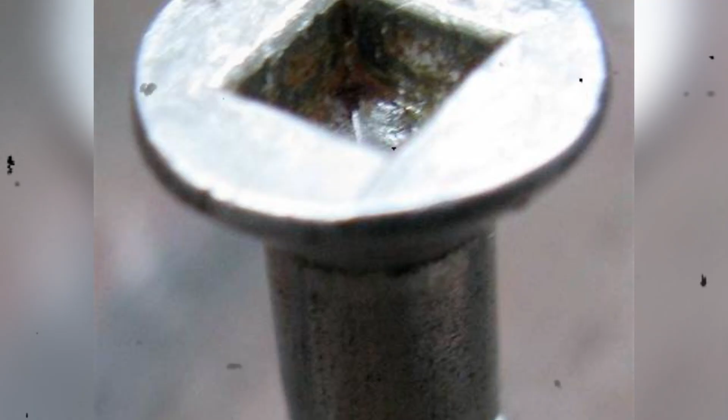In 1914, inside the sprawling automotive assembly plants of the Ford Motor Company, a small piece of Canadian hardware was quietly altering the speed of industrial production. It was a cold-formed screw with a recessed square drive, manufactured in a red brick factory in Milton, Ontario. It did not slip, it did not strip, it did not cam out under the pressure of power drivers.

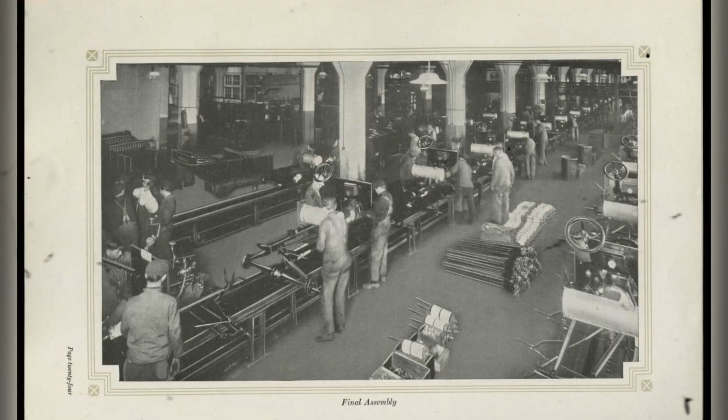Records suggest this single Milton export saved Henry Ford approximately 2 hours of assembly time per vehicle. It reduced wood damage. It prevented assembly line injuries. It was, by every mechanical measure, a flawless industrial fastener.

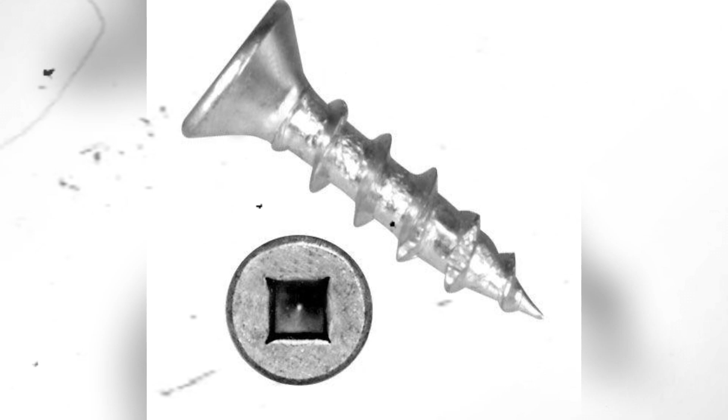Ford wanted it for every factory. He demanded the exclusive rights to manufacture the square drive screw in the United States. But the inventor sitting in Milton refused to surrender control of his patent. He would not license the manufacturing rights. He demanded that every screw be purchased directly from his Canadian plant. That single negotiation sealed the fate of the Robertson screwdriver.

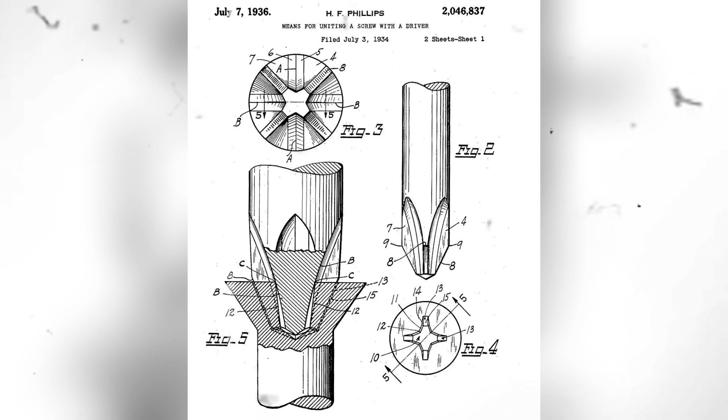It created a profound industrial paradox. Inside Canada, the Robertson drive became the undisputed standard of the trades. Its color-coded handles, green, red, and black, would eventually populate every carpenter's belt, every logging camp workshop, and every hardware store aisle from Nova Scotia to British Columbia. It completely locked the American Phillips drive out of the domestic Canadian construction industry. But outside the Canadian border, the square drive was practically exiled. The Milton Empire secured its domestic dominance at the cost of global expansion.

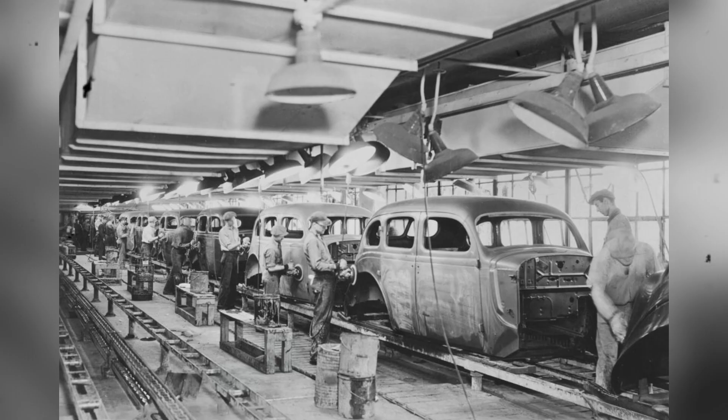Decades later, the original Ontario production lines would halt, the foundational company would be absorbed by American corporate conglomerates, and the ultimate Canadian hand tool would be stripped of its independence. The perfect screw survived, but the Canadian tool-making empire behind it was slowly dismantled.

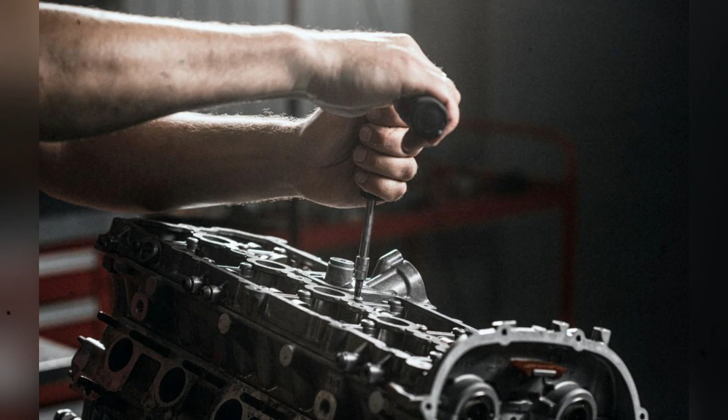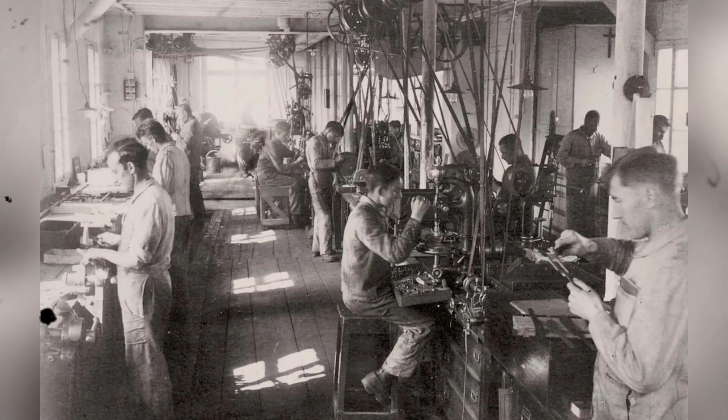For decades, cabinet makers in Ontario, boat builders in Nova Scotia, and mechanics in early Montreal automotive shops accepted cam out as an inevitable cost of doing business. They accepted the stripped screw heads. They accepted the gouged wood. They accepted the bloody knuckles.

The Canadian manufacturing sector was rapidly accelerating toward mass production. The era of pure craftsmanship was giving way to the era of assembly lines. Yet this entire industrial system was held back by a fastener that could not be reliably driven at high speed. The slotted screw was a bottleneck on the factory floor.

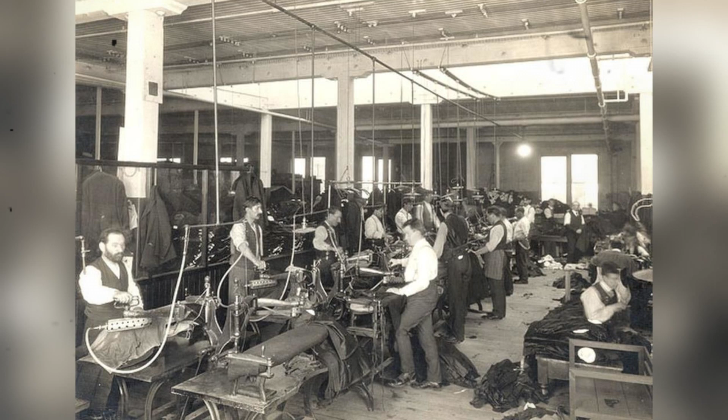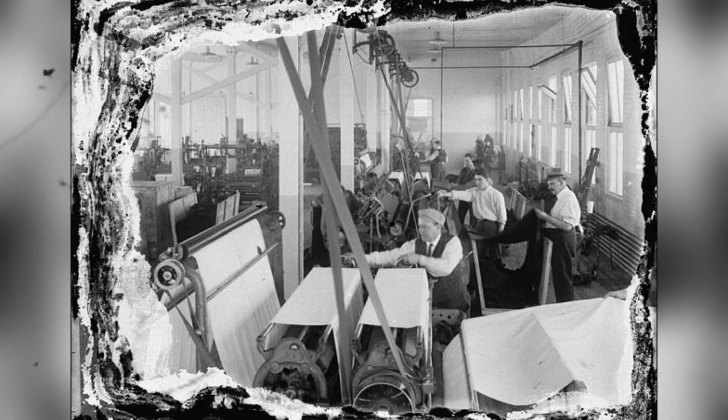It required two hands to operate, one to hold the screw and one to turn the driver. If an early electric or pneumatic driver was applied to a slotted screw, the tool would violently jump from the slot, destroying the workpiece and stalling production. The Canadian industrial economy desperately needed a fastener that could handle immense rotational force without failing.

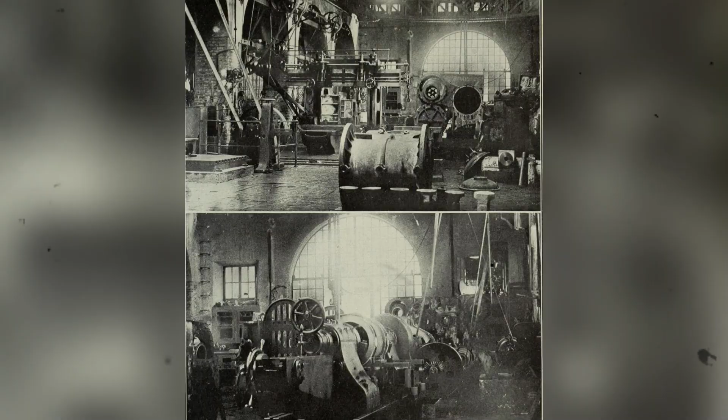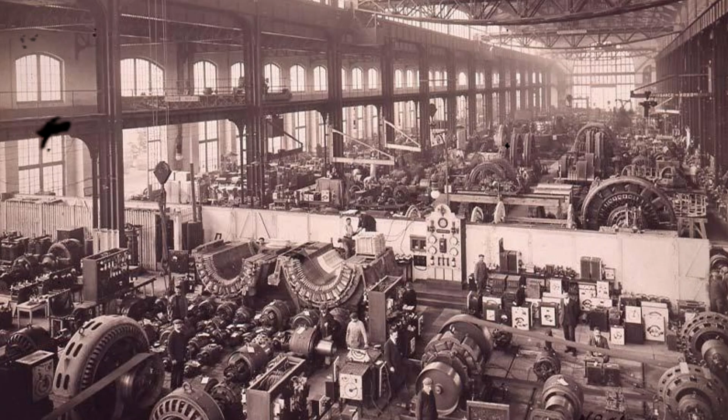The solution was born from physical injury. Peter Lymburner Robertson was a traveling salesman from Seneca Township, Ontario. By one account, he was demonstrating a spring-loaded screwdriver to a group of potential clients on the streets of Montreal. As he applied pressure, the flat blade violently slipped from the slotted screw. The steel drove deep into his hand.

It was a severe cut, but it crystallized a mechanical truth. The straight slot was fundamentally obsolete. A recessed drive, a socket that could physically capture the tip of the screwdriver and lock it in place, was the only logical path forward for modern manufacturing.

The concept of a square drive screw was not entirely new. European and American inventors had theorized it for years, but previous attempts had universally failed at the manufacturing stage. If a factory tried to cut, mill, or punch a square hole into a heated screw head, the surrounding metal would weaken. The corners of the square would easily strip out under the pressure of a screwdriver. The fastener would fail before the wood was clamped tight.

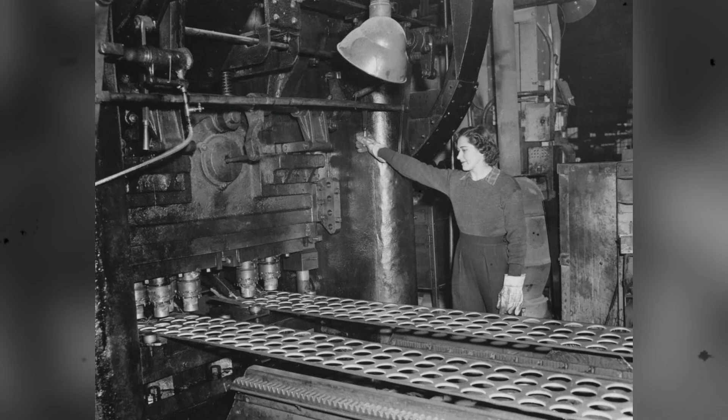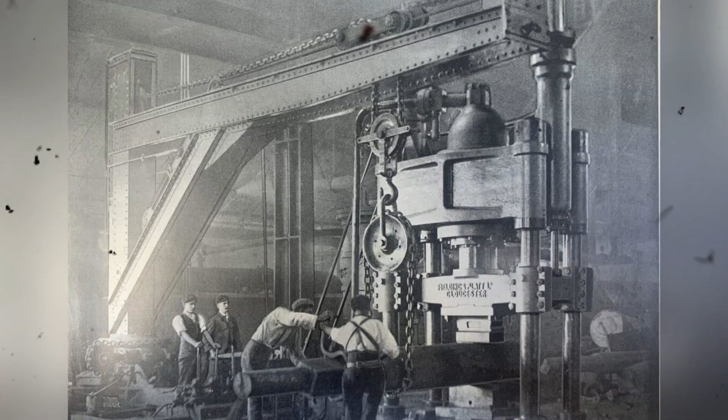Robertson's genius was not just the shape of the recess, but the precise method of forging it. He developed a proprietary cold-forming process. A hardened steel punch would strike the cold steel wire with immense force, simultaneously shaping the dome of the screw head and pressing the tapered square recess deep into the metal. Because the steel was not heated or cut, the cold-forming process heavily compressed the metal grain around the socket. It made the walls of the square recess drastically stronger than the surrounding metal.

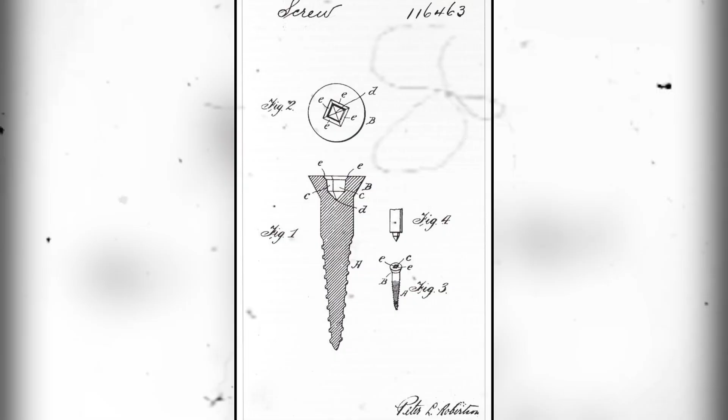It was a flawless manufacturing method. It produced a screw that was virtually indestructible under normal torque. In 1909, Robertson patented his cold-formed square drive screw.

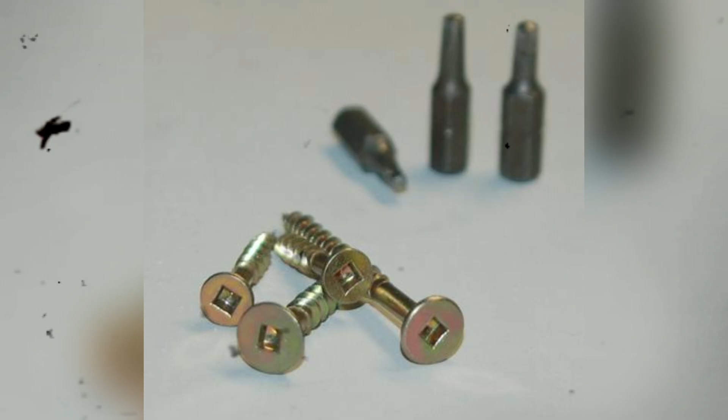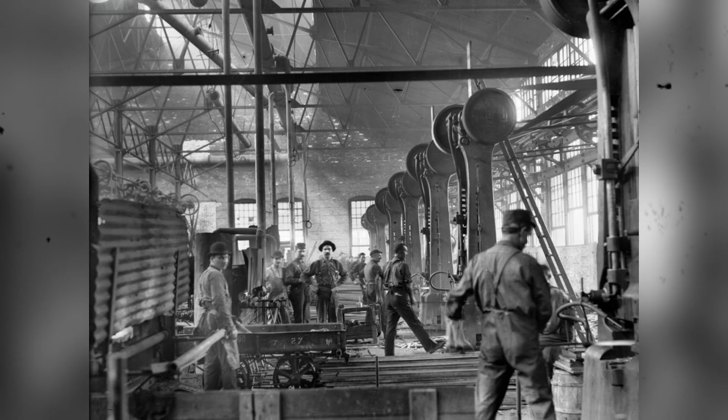He now needed a manufacturing base to scale his invention. He found it in Milton, Ontario, a growing industrial town west of Toronto. The town recognized the potential of his patent and offered a municipal loan, a tax exemption, and the necessary infrastructure to build a serious tool-making operation. The P.L. Robertson Manufacturing Company was officially established in a modest brick facility on Bronte Street.

Getting the square drive screw into the Canadian market required overcoming massive industrial inertia. Factories across the country already possessed millions of slotted screws and thousands of flathead screwdrivers. Transitioning to a proprietary fastener meant changing entire workshop supply chains.

Robertson aggressively marketed his invention directly to local tradesmen. The initial Canadian entry occurred through persistent demonstrations to local woodworkers and small-scale manufacturers in southern Ontario.

When a Canadian carpenter tried the Robertson screw for the first time, they discovered a radical new capability. The slight taper of the square recess allowed the screw to physically cling onto the matching tip of the screwdriver. This friction fit, known as cling, meant a worker could place the screw on the driver, extend their arm, and drive the fastener into the wood using only one hand.

They did not need to hold the screw. They could drive it upside down. They could drive it at awkward angles.

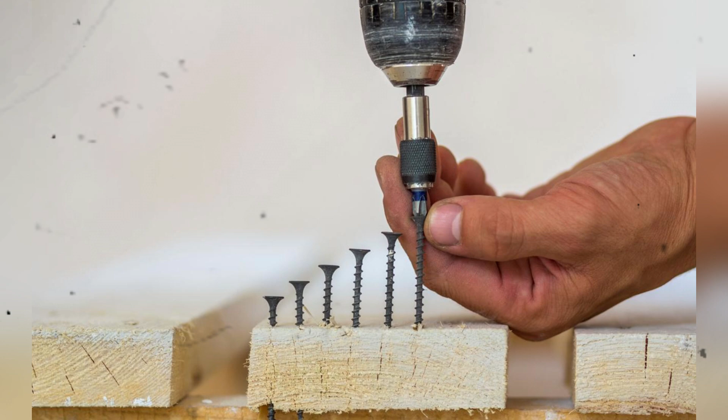The early reception in Canadian industrial circles was an absolute revelation. The T. Eaton Company, a titan of early Canadian retail and manufacturing, began using Robertson screws in their massive Toronto furniture factories to drastically speed up cabinet assembly. Early automotive bodybuilders, such as the Ford Motor Company in Walkerville, Ontario, recognized that the square drive entirely eliminated the devastating paint scratches caused by slipping screwdrivers on assembly lines.

Local hardware stores across Halton County began stocking the new fastener, and tradesmen quickly realized its superiority over anything imported from the United States or Great Britain. The Milton factory began running at capacity. Local hardware catalogs started dedicating space to the unusual square hole. The local trades had spoken.

The Canadian workshop needed a fastener that would not slip, strip, or fail under pressure. P.L. Robertson had delivered it, and the stage was set for an unprecedented expansion into the very heart of North American heavy industry. The shift from a small Milton operation to a national industrial titan required more than just local word of mouth. It required a fundamental mechanical superiority that could be mathematically proven on a balance sheet.

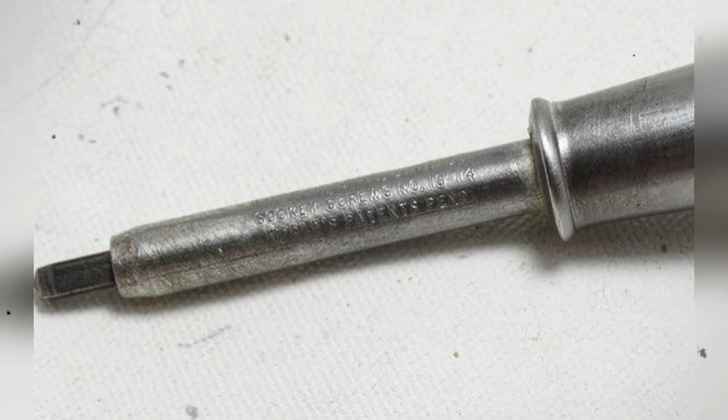The physical architecture of the Robertson fastening system was deceptively simple, yet perfectly engineered for the realities of early 20th century mass production. The recess in the screw head was not a simple punch box. It was a carefully designed, slightly tapered square socket. The matching screwdriver tip featured the exact same precise taper.

This specific geometry achieved two critical mechanical functions that the straight slotted screw could never replicate. First, the square drive distributed the rotational force evenly across the four interior walls of the screw head, rather than concentrating it entirely on a single thin, fragile slot. This massive increase in surface contact allowed workers to apply extreme torque without breaking the screw.

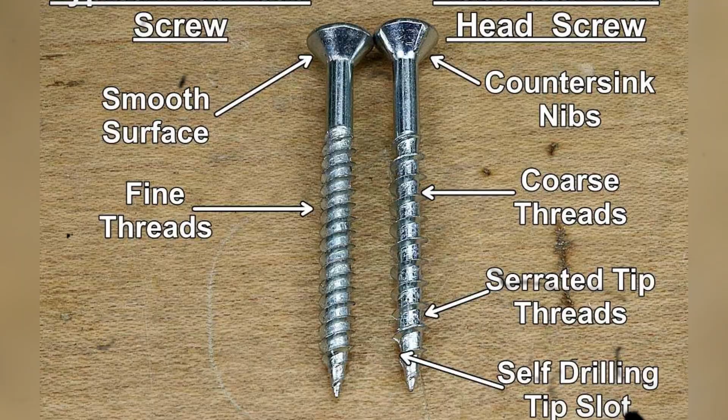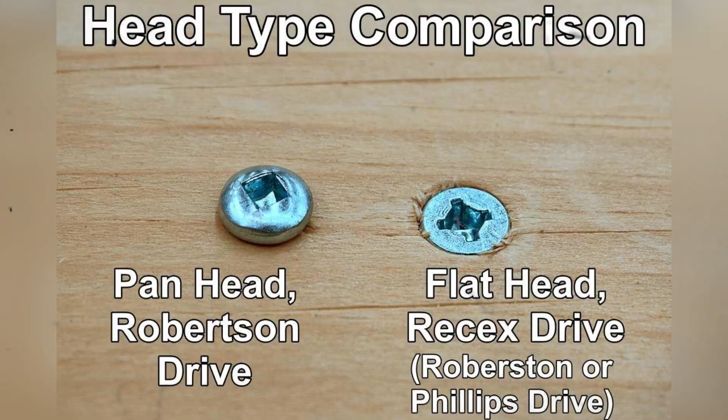Second, the slight taper created an interference fit. When the steel driver was pushed into the steel screw, the two pieces of metal physically wedged together. This mechanical wedge created cling. A mechanic or carpenter could load a fastener onto the driver tip, extend their arm, and swing the tool like a hammer without losing the screw.

In the chaotic, cramped, and rapid environment of an assembly line, the ability to drive a fastener entirely with one hand was an industrial revelation. It freed the worker's second hand to hold the workpiece, position the material, or stabilize their own body.

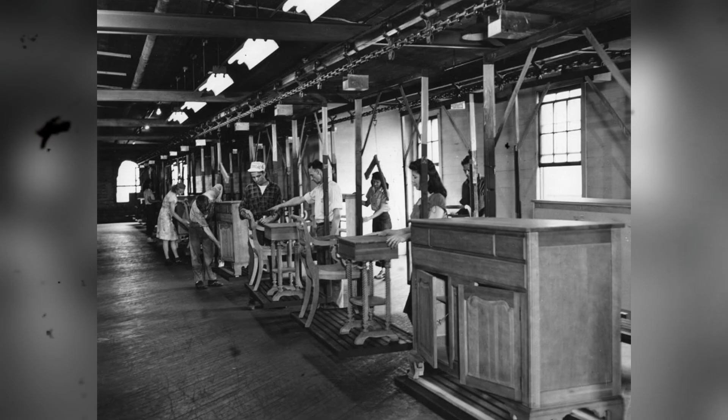But a brilliant design is useless if it cannot be manufactured at scale. P.L. Robertson's ultimate Canadian moat was his proprietary cold-forming process. To create the perfect square recess,

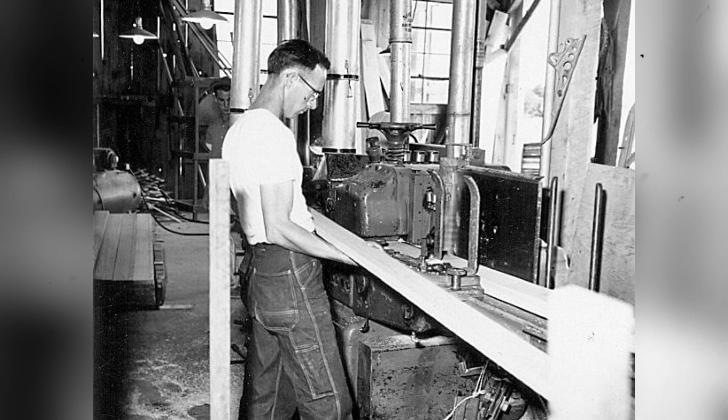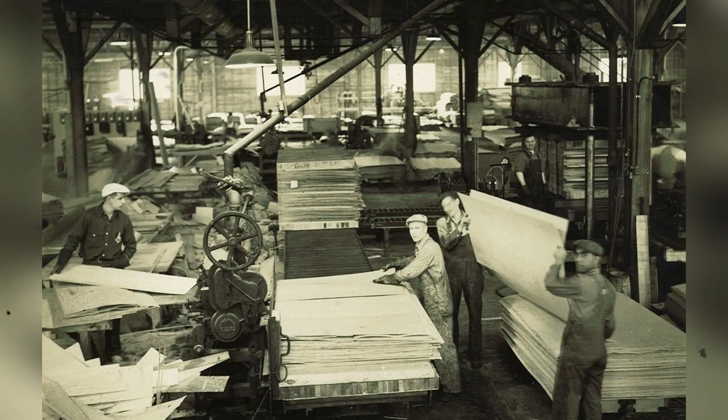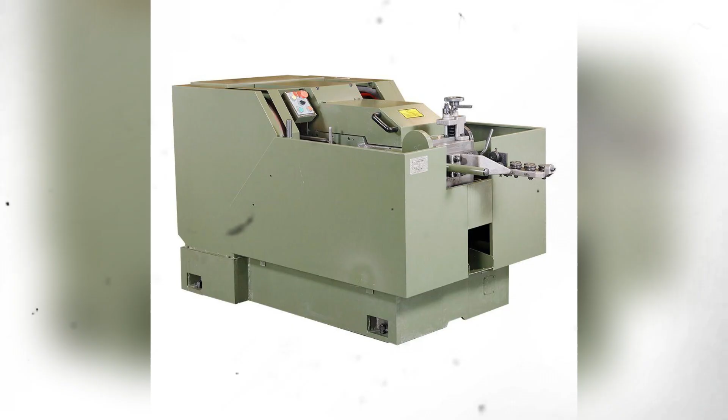Raw, unheated steel wire was fed into massive, violently loud heading machines in the Milton factory. A hardened steel punch struck the wire with thousands of pounds of pressure, instantly forging the dome of the screw and driving the square hole deep into the center. Because the metal was not heated or cut, the cold-forming process heavily compressed the microscopic grain structure of the steel around the socket. It hardened the walls of the drive. It created a fastener that was virtually indestructible under the intense torque of industrial machinery.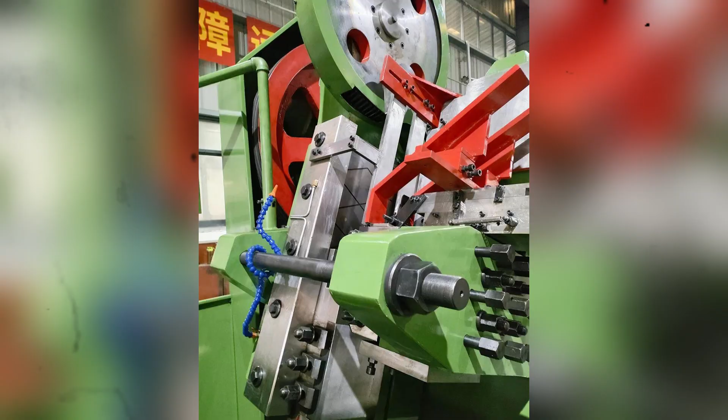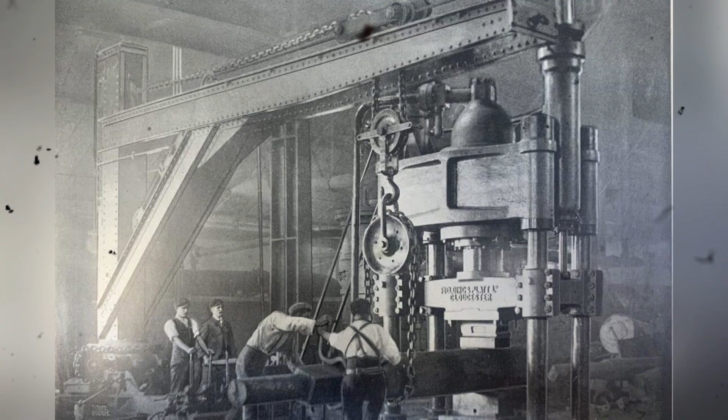The Canadian price context was initially challenging. Robertson screws were slightly more expensive to manufacture per unit than traditional slotted screws. But for large-scale manufacturers, the raw cost of the fastener was irrelevant compared to the cost of human labor and damaged materials. The slotted screw was a liability. When a driver slipped from a slotted screw, the inevitable cam-out, it frequently gouged the surrounding wood, ruined finished surfaces, and slashed the hands of the workers.

The Robertson screw eliminated cam-out. It eliminated the ruined dashboards. It eliminated the bloody knuckles. It eliminated the wasted hours spent extracting stripped fasteners.

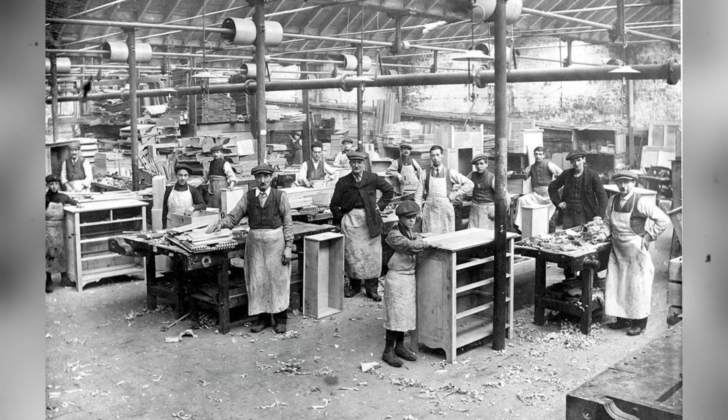The ultimate breakthrough occurred when the Canadian automotive industry recognized this economic math. In Windsor, Ontario, the Ford Motor Company of Canada was rapidly expanding its assembly lines to meet the exploding demand for the Model T. Early automobiles were heavily constructed of wood. Their frames, floorboards, and interior structures required thousands of driven fasteners per vehicle. When Ford of Canada adopted the Milton-made square drive, the acceleration in production was staggering. Available reports indicate that the Robertson screw saved Ford assembly lines roughly 2 hours of labor per vehicle. In the high-volume, hyper-efficient world of automotive manufacturing, 2 hours of saved time was a monumental competitive advantage.

The success in Windsor triggered a massive cascade across Canadian heavy industry. The Fisher Body Company in Walkerville, Ontario, which built the wooden bodies for numerous early automotive brands, placed massive orders with the Milton factory. The square drive allowed their workers to safely use early motorized and pneumatic driving tools, a process that was previously impossible with slotted screws.

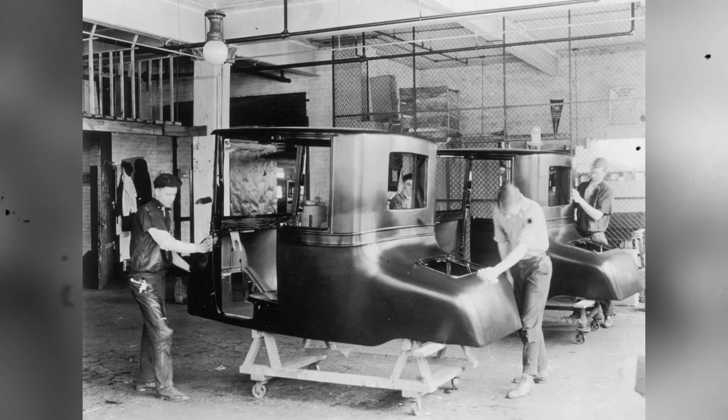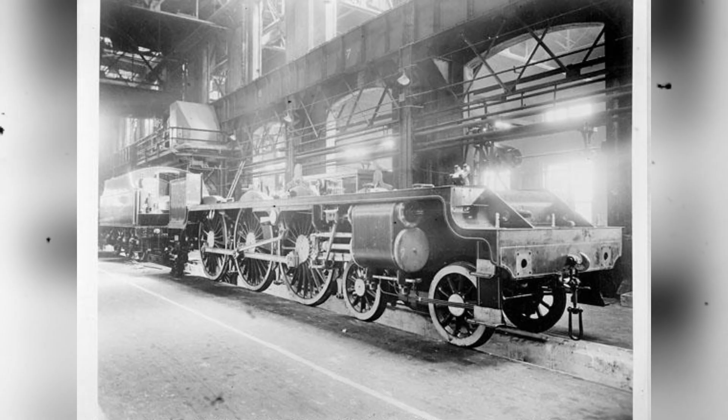This industrial adoption quickly spread beyond the automotive sector. The Canadian Pacific Railway operated the colossal Angus shops in Montreal, Quebec. It was a sprawling industrial complex where thousands of wooden boxcars and passenger carriages were constructed. The Angus shops required a fastener that could withstand the intense, constant vibration of rail travel, yet be driven fast enough to keep up with rolling assembly quotas. They adopted the Robertson drive.

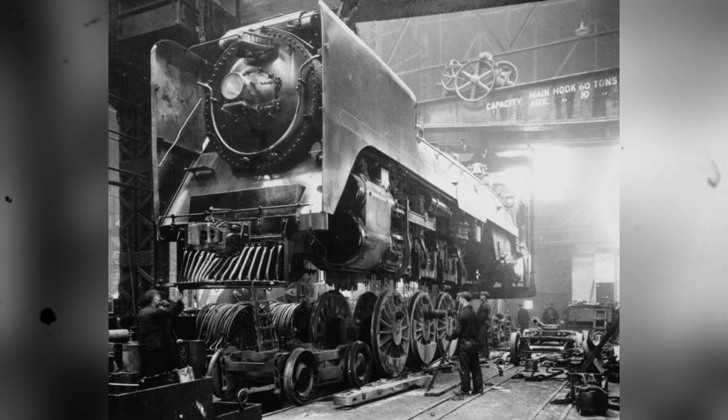The Russell Motor Car Company in Toronto integrated the fasteners into their production. The T. Eaton Company in Toronto, operating massive furniture manufacturing divisions to supply their national catalogs, transitioned their cabinet makers to the square drive. Suddenly, the Robertson screwdriver was no longer just an automotive assembly tool. It was bleeding out into the general Canadian trades.

As thousands of factory workers used the square drive at work, they began demanding it for their own personal toolboxes. Plumbers, electricians, and carpenters across Ontario realized that their traditional slotted screwdrivers were obsolete. The Milton factory aggressively expanded its distribution network to meet this demand. They secured contracts with major Canadian hardware distributors and local mercantile stores. From Halifax to Vancouver, hardware shelves began stocking the distinctive square-tipped drivers alongside massive wooden crates of Robertson fasteners.

P.L. Robertson had built a flawless industrial fortress. He held the patents. He controlled the proprietary cold-forming machinery. He dictated the manufacturing tolerances. He owned the Milton plant. He had successfully embedded his exact specific standard into the assembly lines of the nation's largest manufacturers and the toolboxes of the nation's independent tradesmen. The Canadian workshop was completely transformed, and the Robertson manufacturing empire was poised to enter an era of unprecedented glory.

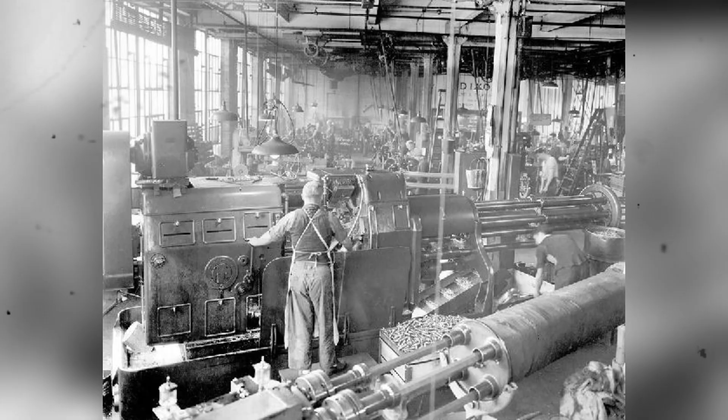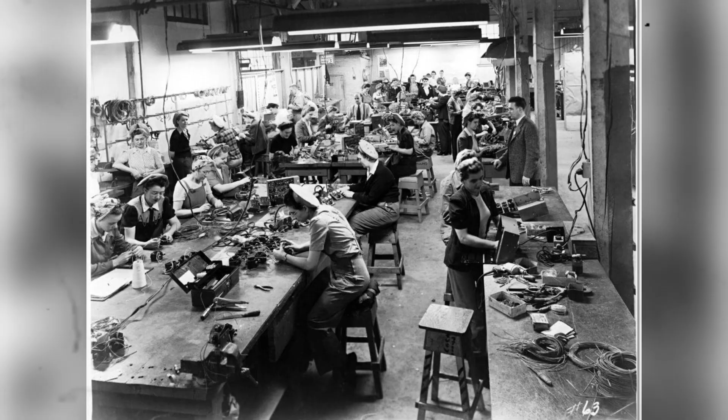By the middle of the 20th century, the P.L. Robertson Manufacturing Company was no longer just a successful local business. It was the gravitational center of the Canadian hardware industry. The original brick building on Bronte Street in Milton had metastasized into a sprawling, multi-acre industrial fortress. It was a self-contained empire of steel, noise, and constant production. The town of Milton essentially synchronized its daily rhythm to the factory whistle. Generations of Halton County families walked through the factory gates, manning the violent, deafening cold-heading machines that continuously punched raw steel wire into perfect square drive fasteners.

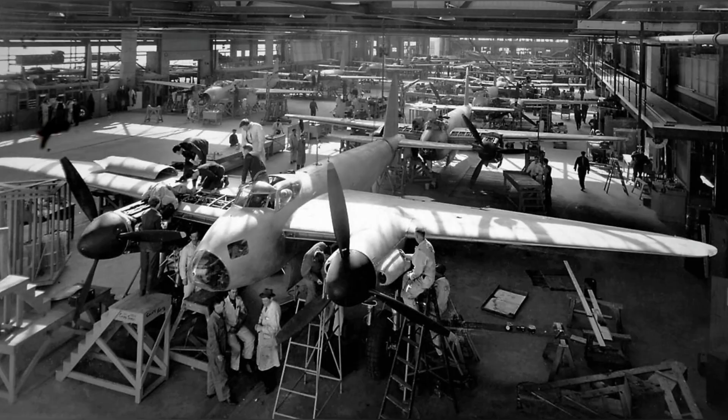The true scale of the Robertson Empire was forged during the Second World War. When the Canadian government mobilized its manufacturing sector for the war effort, the demand for reliable, high-speed fasteners skyrocketed. Slotted screws were a liability in wartime production. There was no time for stripped heads, delayed assembly, or gouged aluminum. The Milton factory became a critical military supplier. When Victory Aircraft in Malton, Ontario, began constructing the legendary de Havilland Mosquito bombers, aircraft famously built almost entirely of wood, they relied heavily on Robertson screws. The precise, slip-free drive was essential for assembling the delicate, high-stress wooden airframes without damaging the surrounding material.

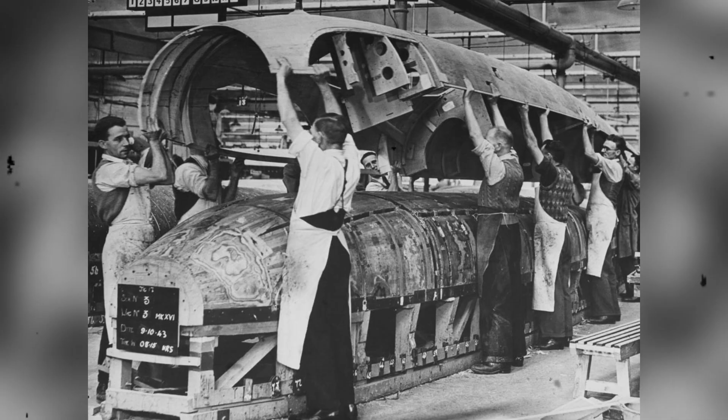On the eastern coast, the sprawling Halifax shipyards in Nova Scotia utilized immense quantities of Milton fasteners to construct the wooden interiors and electrical panels of Royal Canadian Navy corvettes. The war effort required speed, standardization, and absolute reliability. P.L. Robertson delivered all three. The factory operated around the clock, churning out tens of millions of fasteners a month to feed the Canadian war machine. The square drive proved it could withstand the brutal conditions of military assembly lines just as flawlessly as it had conquered the Ford automotive plants decades earlier.

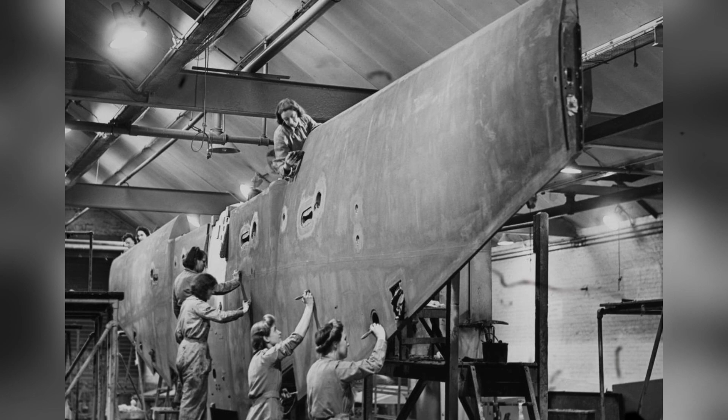When the war ended, the Milton plant did not slow down. It immediately pivoted to supply the greatest construction boom in Canadian history. The creation of the Canada Mortgage and Housing Corporation, or CMHC, triggered an unprecedented explosion of suburban development. Millions of new homes were built across Ontario, Quebec, and the western provinces. Every single one of those homes required hinges, floorboards, electrical boxes, cabinetry, and door frames. The Canadian construction industry universally standardized on the square drive.

It was during this post-war explosion that the Robertson Empire codified its most brilliant and enduring cultural innovation: the color-coded handle system. To help tradesmen instantly identify the correct screwdriver size in a dark toolbox or cluttered workbench, the Milton factory implemented a universal visual language.

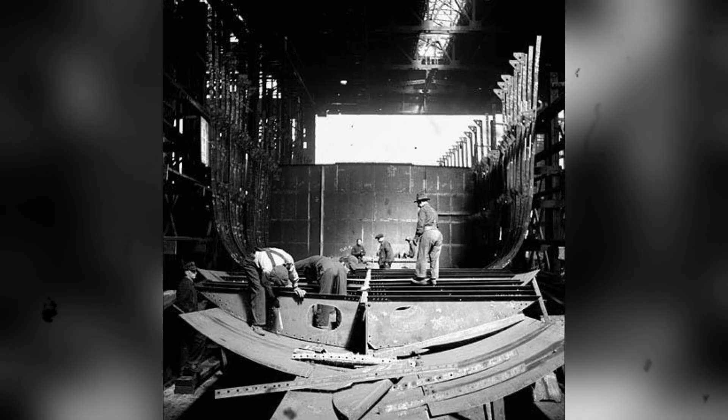The number 0 drive, used for fine cabinet work, was assigned a yellow handle. The number 1 drive, the standard for hinges and smaller hardware, was given a green handle. The number 2 drive, the absolute workhorse of the Canadian construction industry, used for framing and general carpentry, received the iconic red handle. The heavy-duty number 3 drive, reserved for massive structural screws, was marked with a black handle.

This color system bypassed the need to read small stamped numbers on a steel shank. A carpenter on a scaffold in Toronto could look down at his belt, see the red acetate handle, and instantly know he had the correct tool for the number 2 fastener in his hand. It was a triumph of Canadian industrial design.

The yellow, green, red, and black handles became the unofficial flag of the Canadian tradesman. Trade schools across the country, from the vocational programs in Vancouver to the technical institutes in Montreal, exclusively taught their apprentices using Robertson drivers. A generation of Canadian carpenters, electricians, and plumbers learned their trade holding a Milton-made tool.

They learned the feeling of the interference fit. They learned the speed of one-handed fastening. The straight slotted screwdriver was effectively banished from the professional Canadian job site, relegated to the bottom drawer, used only for prying open paint cans or scraping dried glue. The Canadian workshop had completely assimilated the square drive. It was no longer just a tool, it was an expectation.

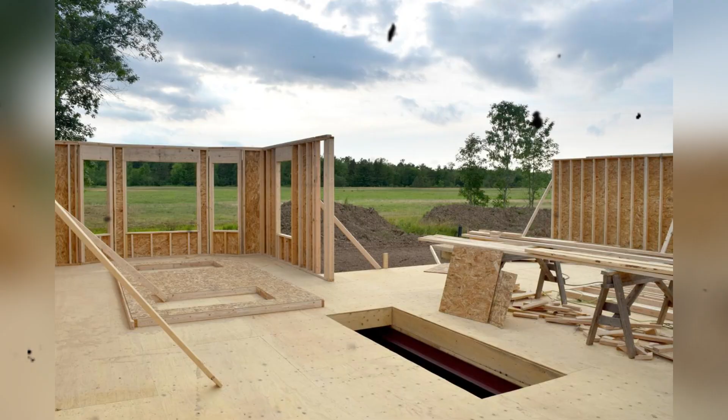The retail conquest of the Canadian market was absolute. When a tradesman walked into a Canadian Tire store in the 1970s, they were not looking for a generic fastener. They were looking for the iconic green cardboard boxes printed with the P.L. Robertson name. Entire aisles were dedicated to the Milton Empire. Massive pegboards displayed rows of acetate-handled screwdrivers, categorized strictly by the yellow, green, red, and black color system.

The distribution network stretched from coast to coast. J.H. Ashdown Hardware in Winnipeg, the massive western mercantile giant, shipped trainloads of Robertson fasteners across the prairies to supply agricultural repair shops and local hardware dealers.

In St. Jacobs, Ontario, the newly formed Home Hardware Cooperative made the square drive a foundational pillar of its national inventory. The Eaton's and Sears Canada catalogs prominently featured Robertson driver sets in their tool sections, ensuring that even the most remote farming communities in Saskatchewan had direct access to the slip-free technology.

The Milton factory had evolved into a massive, highly optimized industrial ecosystem. By the late 20th century, the Bronte Street plant employed hundreds of local workers. The production floor was a deafening expanse of mechanical power.

Massive spools of raw Canadian steel wire were fed into batteries of cold-heading machines. The headers punched the square recess, the thread rollers violently pressed the helical threads into the shanks, and massive heat-treating furnaces hardened the metal to exact specifications.

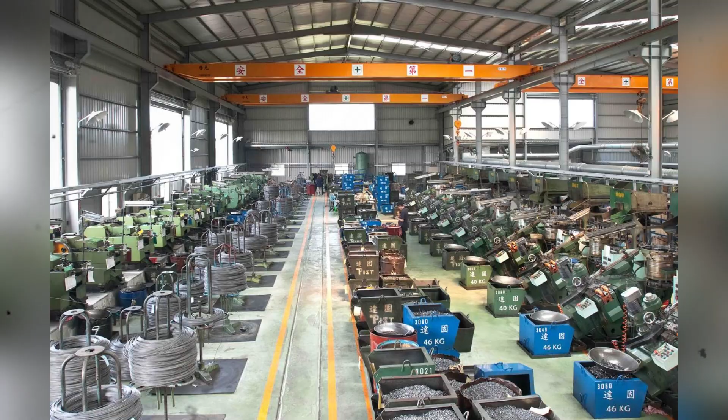Electricians wiring the massive hydroelectric dams in Quebec relied on the long-shank Robertson drivers to securely fasten terminal blocks inside deep electrical panels without dropping the hardware into the machinery.

This was the peak of the Canadian workshop experience. To reach into a leather tool pouch and pull out a red-handled Robertson screwdriver was to hold a flawless piece of domestic engineering. It was a tool that solved a universal industrial problem, manufactured entirely within the borders of Ontario, distributed through national retail networks, and driven into the spruce frames of millions of Canadian homes.

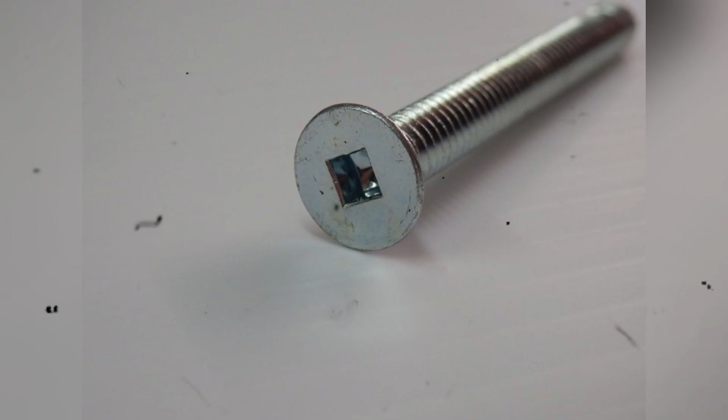P.L. Robertson had built a self-sustaining industrial loop. The Milton factory had achieved total market saturation. Every framing crew in Calgary, every boatyard in Halifax, and every assembly line in Windsor relied on the precise, tapered geometry of the square recess. It was a domestic empire without equal, but this massive scale masked a fatal vulnerability. The entire Robertson operation was perfectly optimized to feed a single, isolated market.

The fortress was impenetrable from the inside, but it was entirely cut off from the global economy. The perfect screw had conquered the nation, but the decisions of the past had guaranteed it would never conquer the world. The collapse of the Milton toolmaking empire was not triggered by a failure of engineering. It was triggered by a fatal miscalculation of industrial leverage.

The systemic fracture of the P.L. Robertson Manufacturing Company did not begin in the late 20th century. The turning point occurred decades earlier, precisely at the moment the square drive was poised to conquer the American automotive industry. By all historical accounts, Henry Ford recognized the absolute mechanical superiority of the cold-form square drive. His early Canadian assembly lines in Windsor had proven that the Milton fastener saved immense amounts of labor, prevented material damage, and vastly improved production speed.

Ford wanted to standardize the entire Ford Motor Company, the largest industrial manufacturing system on the planet, on the Robertson fastener. But Ford demanded supply security. The American industrial machine could not rely on a single independent factory in Ontario to feed its global assembly lines. A border dispute, a railway strike, or a catastrophic fire at the Milton plant could paralyze Ford's entire automotive production.

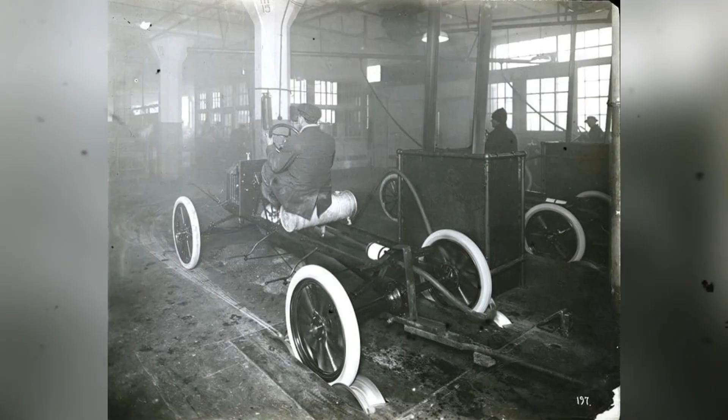Therefore, Ford demanded the rights to license the patent. He wanted to manufacture the square drive screws in his own factories, or license multiple American steel mills to produce them simultaneously. P.L. Robertson refused. He had previously suffered a disastrous licensing agreement in Great Britain, an ordeal where he temporarily lost control of his patents, his capital, and his international manufacturing rights.

That European failure left him fiercely protective of his proprietary cold-forming process. He refused to license the manufacturing rights to anyone. He demanded that Henry Ford purchase the fasteners directly from the Milton plant, or through a wholly owned subsidiary that Robertson completely controlled. Ford withdrew. The Ford Motor Company would not be held hostage by a Canadian supplier. The negotiation collapsed, and with it, the single greatest opportunity for Canadian hand tool dominance in history.

This refusal created a massive vacuum in the American industrial market. The United States manufacturing sector desperately needed a recess-driven screw to replace the obsolete slotted fastener. In the 1930s, an American businessman named Henry F. Phillips provided the solution. He patented the crosshead drive.

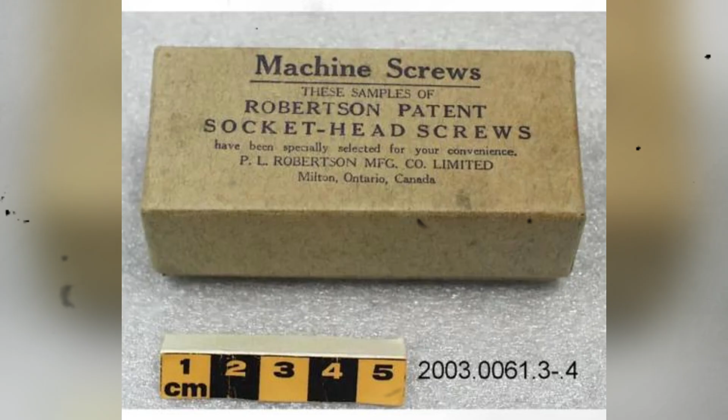Mechanically, the Phillips drive was fundamentally inferior to the Robertson for manual trade work. It possessed sloping internal walls specifically designed to cam out. It was engineered to forcefully eject the screwdriver tip to prevent automated heavy torque assembly machines from over-tightening the fastener. It damaged the screw head by design. It required intense forward pressure to keep the driver engaged. It was everything the Canadian square drive had successfully eliminated.

But Henry F. Phillips understood the systemic power of corporate licensing. Phillips did not want to build a sprawling factory. He did not want to manufacture screws. He simply wanted to license the crosshead design to every massive steel mill and fastener factory in the United States.

General Motors adopted the Phillips drive for the 1936 Cadillac assembly lines. The American military adopted it to standardize wartime production. The United States hardware market completely surrendered to the crosshead design. The Canadian tool-making empire was permanently locked out of the largest consumer and industrial market on Earth. The perfect square drive was effectively quarantined north of the 49th parallel.

For decades, the sheer, overwhelming volume of the domestic Canadian construction boom masked this fatal vulnerability. The Milton factory was running at maximum capacity. The green, red, and black handles were dominating Canadian Tire shelves, but a tool empire cannot survive indefinitely on a single isolated market. This isolation created a frustrating, bifurcated reality for the Canadian tradesman.

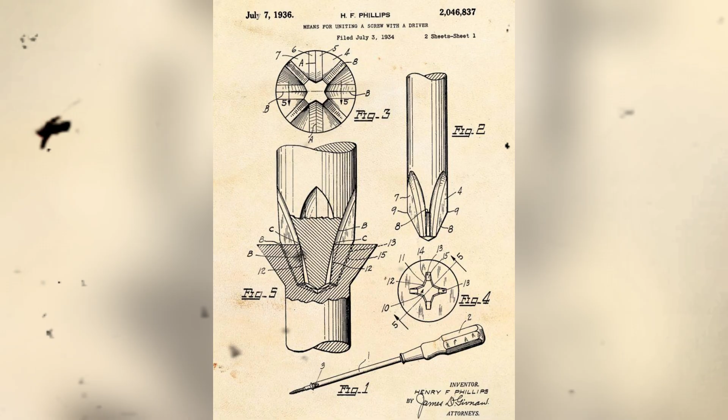Because the United States had standardized on Phillips, every imported American automobile, refrigerator, industrial machine, and consumer appliance sold in Canada was assembled with crosshead screws. Canadian mechanics and electricians were forced to carry both systems. They used their beloved, flawless Robertson drivers for domestic construction, and they reluctantly used their Phillips drivers to repair the endless flood of American imports.

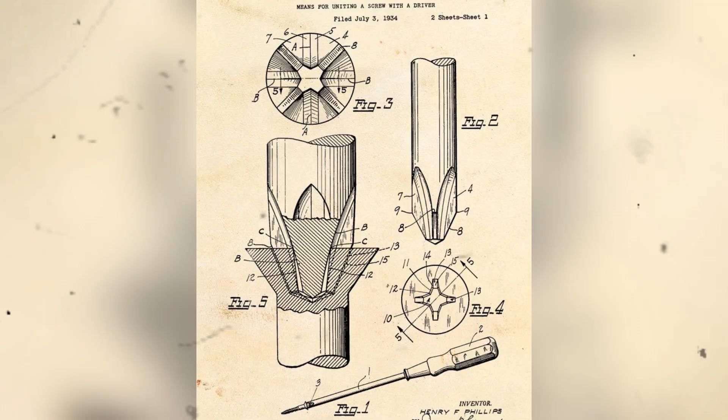In 1951, P.L. Robertson died. The visionary founder who had transformed a small brick building on Bronte Street into a national industrial titan was gone. The family company continued operating, maintaining its absolute domestic monopoly throughout the 1950s and 1960s. However, without its fiercely independent founder, the company slowly transitioned from an engineering-driven fortress into a vulnerable corporate asset.

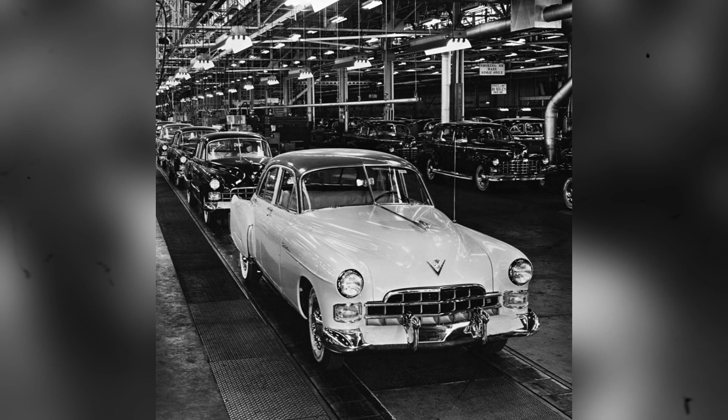Running the sprawling Bronte Street plant required constant, immense, uninterrupted volume. Simultaneously, the global retail landscape was consolidating.

Canadian hardware chains were evolving into massive corporate entities. They were fiercely competing on price, and began demanding lower wholesale costs from their domestic suppliers. The Milton factory was suddenly facing intense margin pressure, producing a premium, flawless fastener in a high-cost Canadian manufacturing environment, trapped inside a single country. The corporate conglomerates were circling, and the independence of the Milton Empire was about to be permanently broken.

In 1968, the era of total independence officially ended. The P.L. Robertson Manufacturing Company was acquired by Procor Limited, a massive Canadian industrial firm. However, Procor itself was a subsidiary. This corporate absorption initiated a slow, systemic dismantling of the Canadian manufacturing loop.

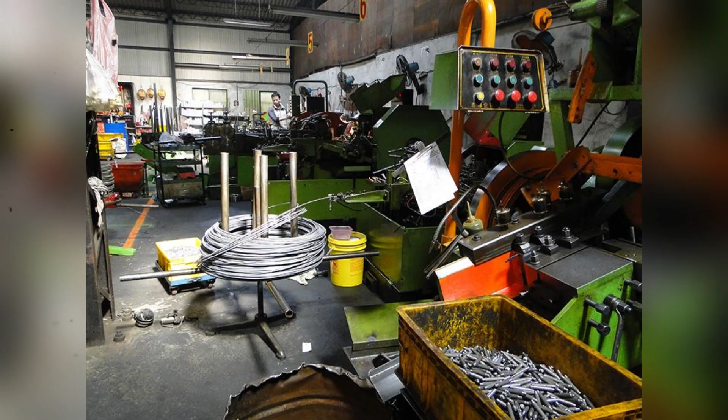The offshore foundries did not utilize P.L. Robertson's proprietary cold-forming machinery. They simply stamped or punched a square hole into cheap, heated, soft steel, ignoring the highly specific, microscopic taper of the inner walls. Without that precise taper, there was no interference fit. Without the interference fit, there was no mechanical cling.

When a modern Canadian carpenter reached into a bulk bin at a massive big box hardware store and loaded a generic offshore screw onto their driver, the magic of the Milton design was completely gone. The screw wobbled on the tip. It fell off the driver. When heavy torque was applied, the soft, stamped steel yielded, and the corners of the square recess instantly stripped out into a useless circle.

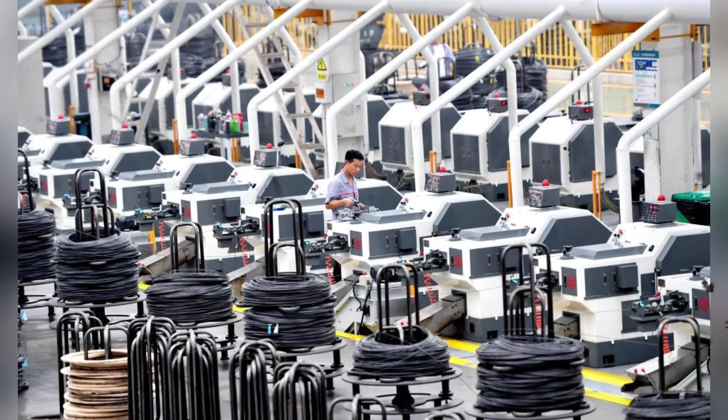The generic imports behaved exactly like the flawed, destructive fasteners that P.L. Robertson had eradicated a century earlier. But the modern hardware retail system prioritized volume and inventory cost over flawless mechanical geometry. The massive retail chains, Home Depot, Rona, and the modernized Canadian Tire, began allocating their primary shelf space to bulk bins of cheap imported, generic square drive fasteners.

The original, authentic Robertson boxes were pushed to the premium aisles. The Milton factory was suddenly forced to compete on price against massive Asian industrial complexes that possessed a fraction of the labor and material costs. The American corporate ownership of the Robertson brand analyzed this brutal retail math.

Operating a massive unionized steel facility in Halton County, Ontario, was deemed economically inefficient. The cost of Canadian steel, Canadian electricity, and Canadian manufacturing labor could not be reconciled with the retail demand for cheap hardware. To survive the retail price war, the corporate ownership executed the ultimate retreat.

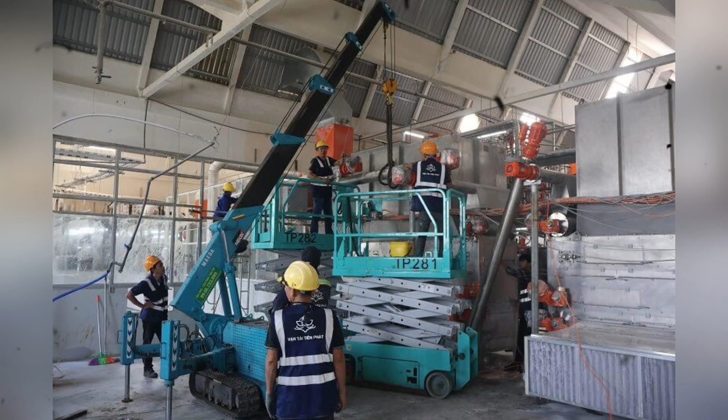The company began systematically outsourcing its manufacturing. The authentic Robertson brand survived, and the precise engineering specifications were maintained on their premium lines. The iconic green cardboard boxes remained on the shelves, but the steel inside those boxes was no longer forged on Bronte Street. The production was slowly shifted to massive fastener factories in China. The core physical reality of the Canadian toolmaking empire was quietly hollowed out.

The town of Milton was rapidly changing. The sprawling agricultural lands surrounding the factory were being paved over as the town transformed into a massive commuter suburb for the Greater Toronto area. The local economy no longer required an industrial anchor. The massive footprint of the Bronte Street plant became far more valuable as commercial real estate than as a functioning tool factory.

The corporate retreat accelerated. The massive cold-heading machines were powered down. The workforce was drastically reduced. The deafening roar of Canadian steel wire being violently punched into perfect, square drives faded away. The factory whistle stopped blowing. The local supply chain collapsed.

The Milton gates were locked. The original brick buildings were abandoned. The manufacturing lines stopped. The machines were dismantled. The workforce was dismissed. The factory floor was silenced. The domestic empire folded.

Today, the P.L. Robertson brand still survives in the Canadian retail landscape. You can walk into any hardware store from St. John's to Victoria and find the iconic green cardboard packaging resting on the shelves. But the corporate entity operating under that famous name is a hollow reflection of the original Milton empire. The modern brand is a heavily managed subsidiary of a massive American holding company.

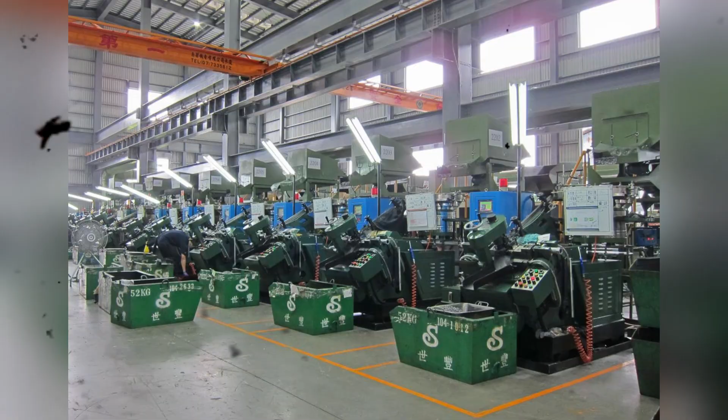The vast majority of the steel inside those modern green boxes is no longer forged in Ontario. It is stamped, pressed, and shipped from massive industrial foundries in Asia. The company that invented the cold-form square drive is now largely an importer of its own legacy.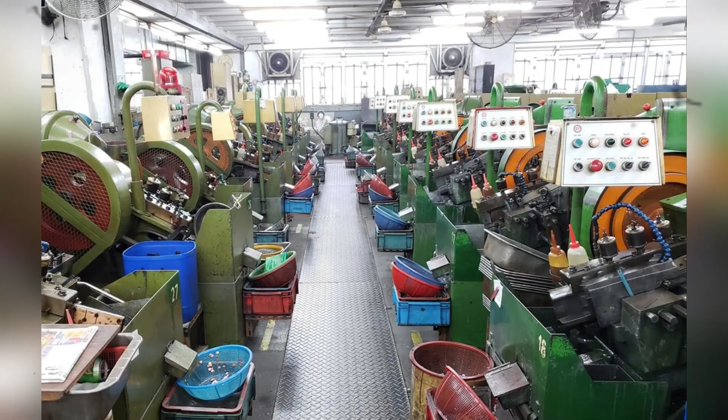Yet across the Canadian provinces, a quiet, stubborn preservation movement exists. It is not organized in formal museums or historical societies, but inside the battered metal toolboxes of veteran carpenters, retired machinists, and heritage woodworkers. There is an active, deeply committed community of Canadian tool collectors who refuse to purchase modern, outsourced drivers. They spend their weekends hunting through flea markets in Aberfoyle, estate sales in rural Ontario, and agricultural auctions in the prairies, searching for the original cellulose acetate handles.

They know the distinct, slightly acidic smell of aging vintage plastic. They look for the specific, deeply stamped letters, PLR, on the hardened steel shank. They separate the genuine Milton production from the modern generic imports.

They seek these original Canadian drivers because the mechanical truth of 1908 remains entirely valid today. An original, cold-formed Robertson screwdriver possesses a physical exactness that modern, mass-produced generic tools simply cannot replicate. When a Canadian carpenter slides a vintage, red-handled No. 2 driver into an original cold-formed Milton screw, the mechanical magic instantly returns. The interference fit is absolute. The cling is undeniable. A worker can hold the tool horizontally, aggressively shake the handle, and the steel fastener will not drop.

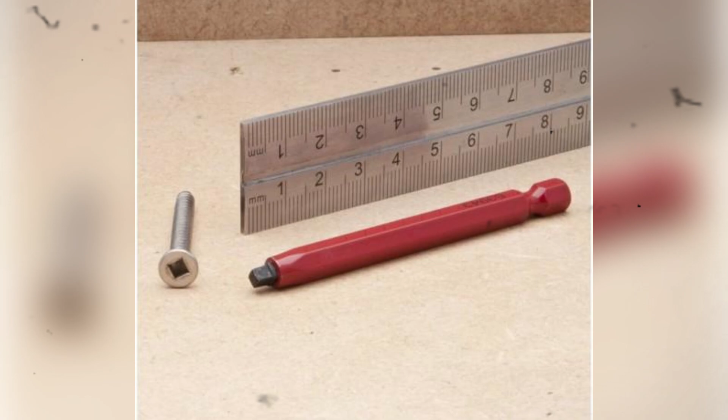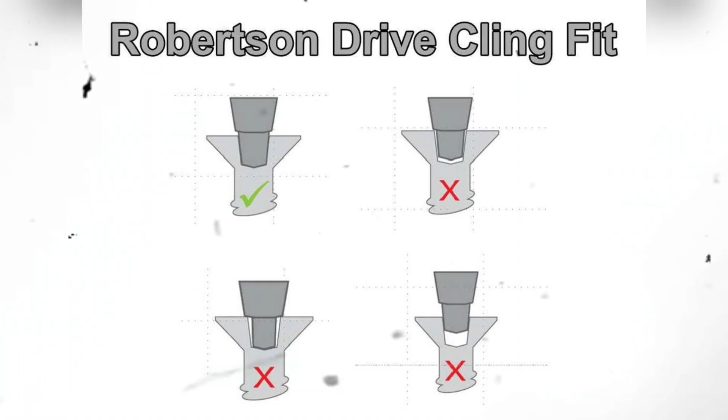The tool becomes a seamless extension of the worker's arm. It is a physical reminder of an era when a manufacturer prioritized the flawless completion of the task over the fractional reduction of retail costs. The steel does not yield. The wood does not strip. The design works perfectly.

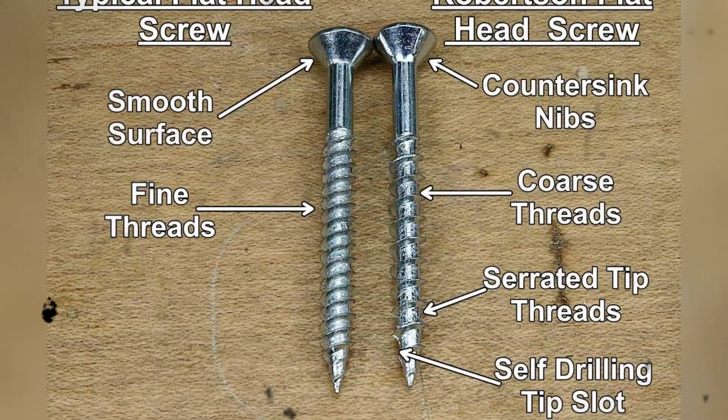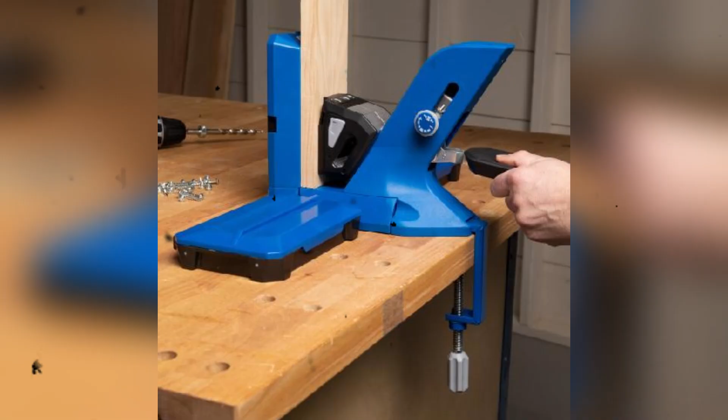There is a profound, almost tragic irony in the global legacy of the square drive. More than a century after Henry Ford aggressively rejected P.L. Robertson's strict manufacturing terms, the American industrial sector is finally realizing what the Canadian trades intuitively knew in 1908. High-end custom cabinet makers, specialized architectural builders, and fine furniture craftsmen in the United States have quietly abandoned the Phillips drive. They are currently importing millions of specialized fasteners to assemble their premium woodworking projects.

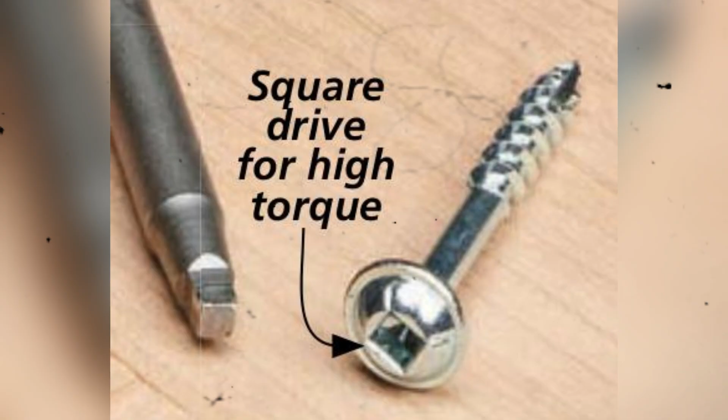Massive American tool companies have built entire modern woodworking systems, such as specialized pocket-hole joinery jigs, entirely around the exact same square recess that Robertson invented. They are adopting the identical mechanical geometry that Ford walked away from. However, because the original patents expired decades ago, the American market rarely refers to it by the name of the Ontario traveling salesman. They simply call it a square recess or a pocket-hole screw. The Canadian invention finally conquered the American workshop, but the Canadian tool-making empire received none of the credit and none of the capital.

If you drive into Milton, Ontario today, the physical evidence of this colossal industrial achievement is practically erased. The town is no longer an isolated, self-sustaining manufacturing powerhouse. It has been absorbed into the sprawling, affluent commuter belt of the Greater Toronto Area. The vast geographic footprint of the original Bronte Street factory has been irreversibly fragmented.

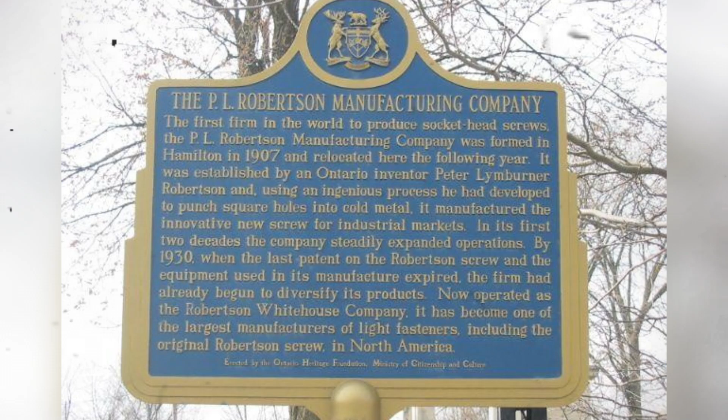The massive, thick brick walls that once vibrated with the deafening, earth-shaking thunder of cold-heading machinery have been heavily redeveloped or demolished. Where generations of Halton County families once stood over glowing heat-treating furnaces to forge the perfect industrial fastener, there are now modern commercial retail plazas, commuter parking lots, and quiet suburban streets. The factory whistle that once dictated the daily rhythm of an entire Canadian county has been permanently silenced.

The knowledge of the machinists, the skill of the tool and die makers, and the raw industrial capability of the plant have completely evaporated. The Canadian manufacturing loop is permanently broken.

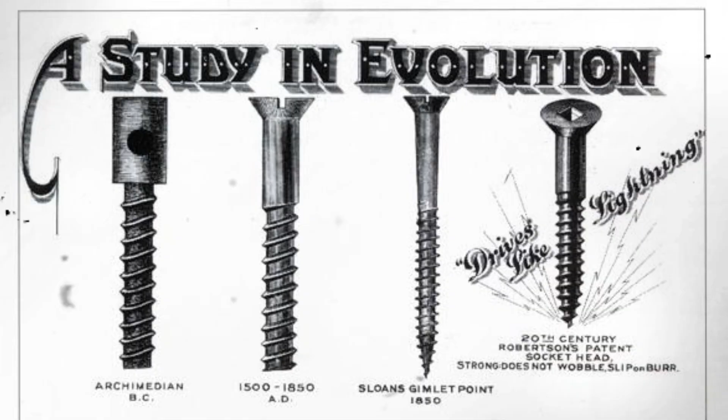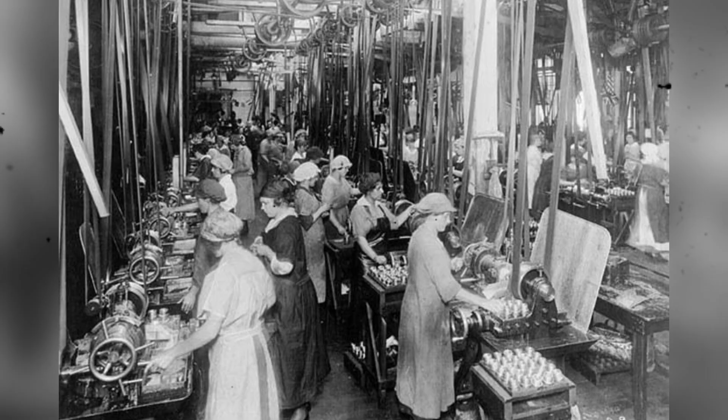The story of the Robertson screwdriver is the ultimate paradox of Canadian industrial design. It was a flawless, revolutionary invention that successfully solved a universal mechanical failure. It conquered the Canadian workshop through sheer, undeniable engineering superiority. It protected the hands of the workers, it accelerated the assembly of the nation, and it became an enduring cultural symbol of domestic craftsmanship. But an industrial tool empire cannot survive indefinitely on engineering alone.

It requires massive, aggressive global scale. It requires immense international leverage. It requires the ruthlessness to dictate terms to a globalized market. P.L. Robertson built the perfect tool, but he built it inside an impenetrable domestic fortress. When those fortress walls were eventually breached by shifting supply chains, relentless corporate consolidation, and the brutal math of globalized big-box retail, the manufacturing system rapidly collapsed, even as the tool itself survived.

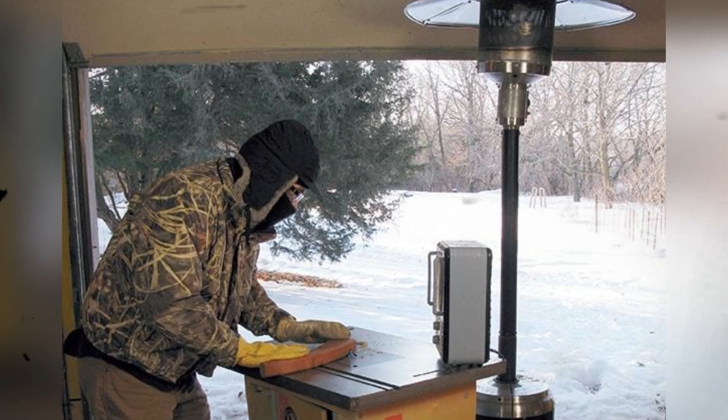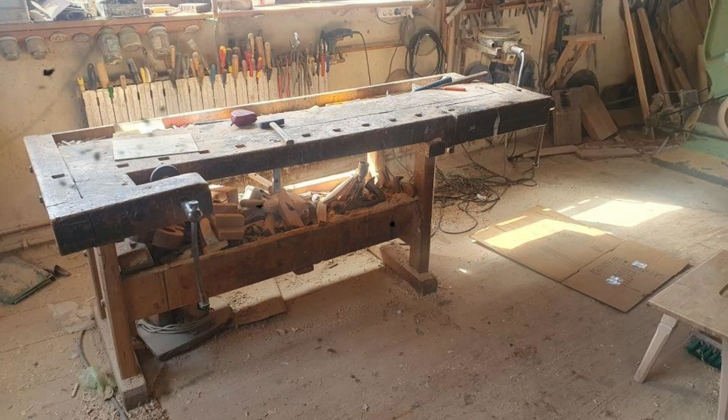The Milton factory is gone, the American conglomerates own the brand, and the offshore foundries forge the steel. But inside a freezing, unheated garage in rural Saskatchewan, an original, deeply scratched red-handled screwdriver still hangs above a heavy wooden workbench, waiting for the next generation to grip the handle and turn the screw.